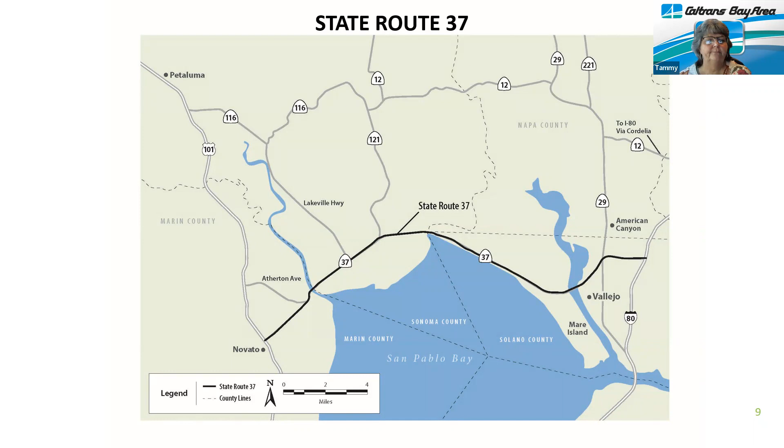Next slide, please. The PEL study we're working on for State Route 37 is the first PEL study conducted on the state highway system in California.

Some benefits of conducting a study like this include allowing us to look at the big picture by examining a broad area or corridor and analyzing transportation, environmental, community, and economic goals early in the planning process; establishing a long-term transportation vision and setting the stage for focused future projects; gathering preliminary data and considering a conceptual level of design, traffic analyses, and evaluation of environmental impacts; soliciting input and, if possible, support from the public, tribes, elected officials, resource agencies, and other stakeholders regarding agency transportation decisions; establishing buy-in from agencies and stakeholders on a corridor vision, purpose and need, range of alternatives, and consideration of key environmental issues; and lastly, encouraging working relationships and early agency involvement, which enables more effective decision-making.

One of the primary reasons Caltrans is conducting the PEL study is to address sea level rise and look for solutions. The various alignments and alternatives we have evaluated for future improvements to the corridor all consider sea level rise.

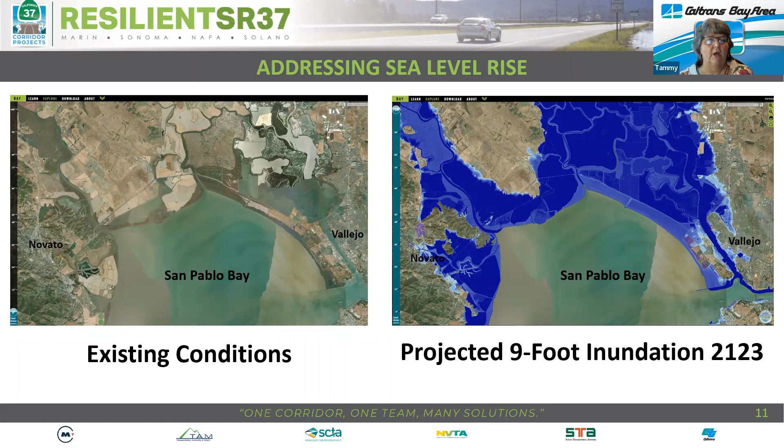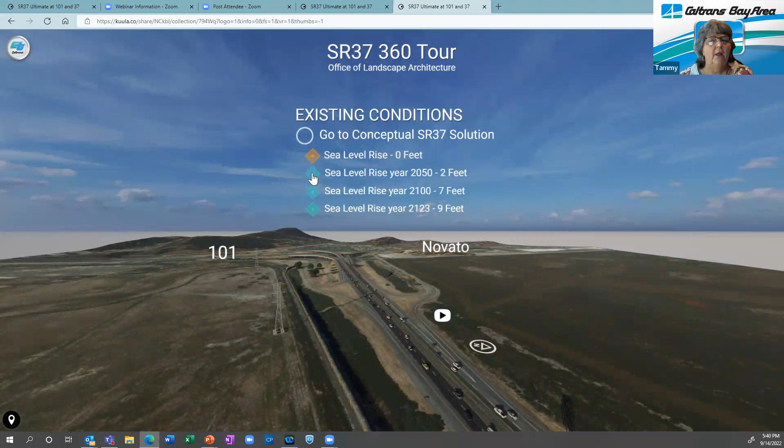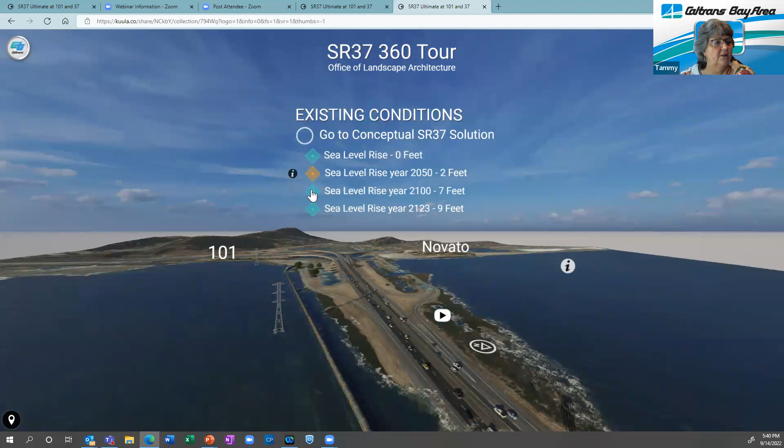Next slide, please. We've prepared several 360-degree visualizations showing various scenarios and conceptual solutions for State Route 37. The view we'll show tonight is of the western portion of the corridor near Highway 101. These visualizations allow you to scroll and view the corridor with focus on several scenarios. The first was 0 feet of sea level rise, then sea level rise in the year 2050 with about 2 feet of inundation, next 7 feet of inundation in the year 2100, and lastly 9 feet of inundation in year 2123.

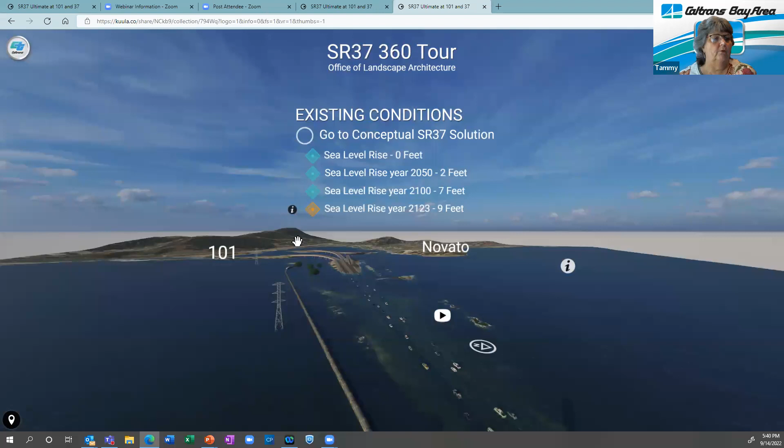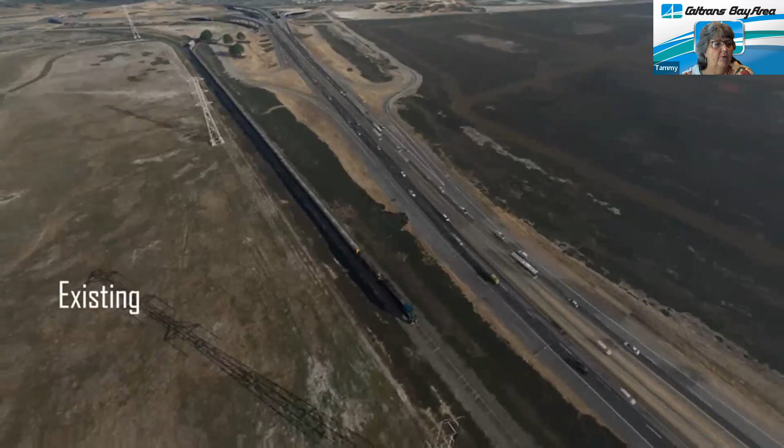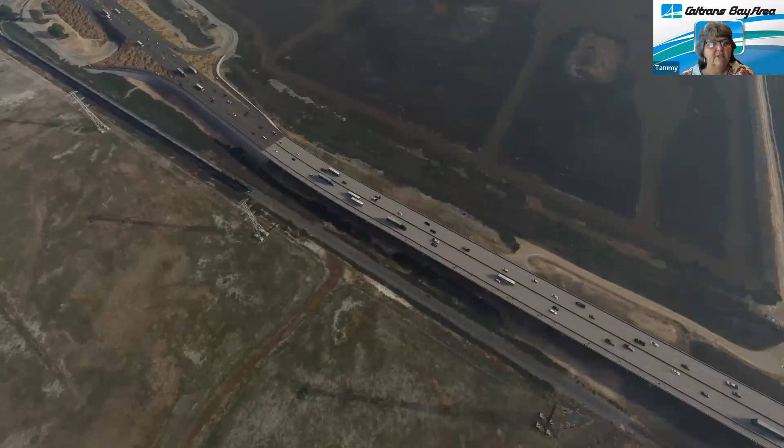We will show a short flyover of a conceptual solution for State Route 37. This starts at Highway 101 at Novato Creek, showing existing conditions, and then the projected 7 feet of sea level rise at the year 2100. You can slowly see here the inundation at year 2100.

I'll turn our presentation over to John Cook, a member of our PEL study team, who will now share details about the work we have done to evaluate potential alignments, modes, and other considerations. Thanks so much, Tammy.

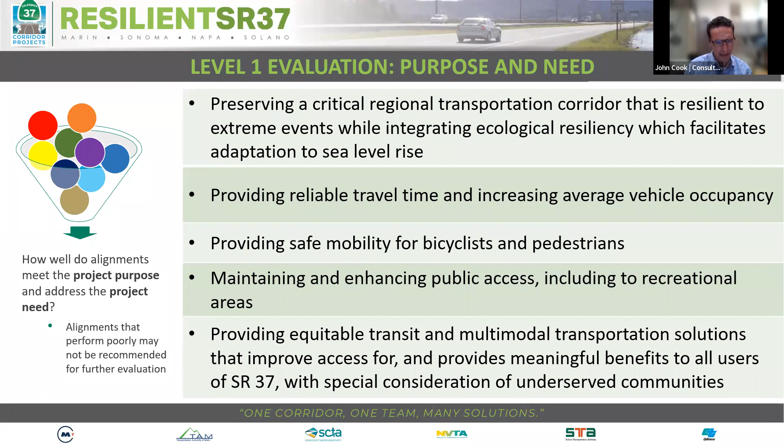This is where we started. We started with 9 preliminary alignments, part of the level 1 screening. These alignments were adapted from a number of prior studies conducted throughout the corridor over the last several years by Caltrans and by other regional transportation agencies.

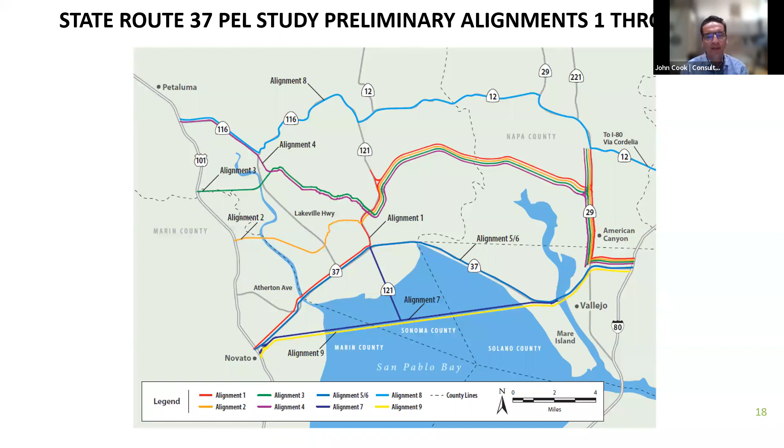So they formed a really good starting point for us in this PEL study to look at, and as you'll see, we did add some as the process went along. So I'm going to go through each one of these one by one over the next several slides, just to orient everyone to these alignments.

Alignment 1 started at US 101 in Novato and followed the existing State Route 37 corridor east towards Highway 121 at Sears Point, continued north on existing 121 just past the raceway, and then took a turn to the east over what would be a new roadway. This roadway roughly parallels some existing railroad tracks in the area that connect over in the Highway 29 area and continue on towards Suisun. Eventually this new alignment would meet Highway 29 north of American Canyon, and people wishing to get to Interstate 80 could go either via Highway 12 in Cordelia or go south through American Canyon and connect in Vallejo. So that's alignment 1.

Alignment 2 would have started again from the west, creating a new interchange on 101 just north of Novato, between Novato and Petaluma. It would go cross-country across marshland, including a bridge across the Petaluma River, and then cross Lakeville Highway, eventually making its way towards Highway 121 and using that existing alignment for a few miles. Then again it would take that turn to the east, following the same alignment as alignment 1 along the railroad tracks towards American Canyon and I-80.

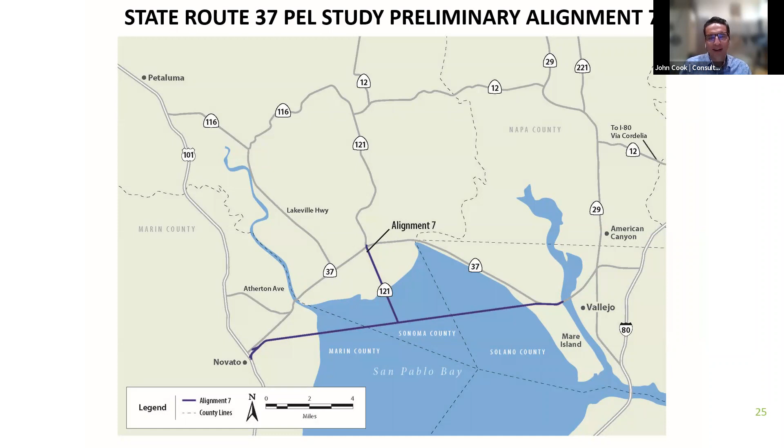As we're seeing some comments in the chat, you'll see that a lot of these were screened out. So please stay tuned, and you'll see some results soon. If we can go to the next slide, please.

So this roadway, unlike some of the other alignments I showed you before, is already there, but the concept would be to expand it a bit to handle additional capacity. And the existing Highway 37 would be abandoned in that circumstance. So, okay, let's continue.

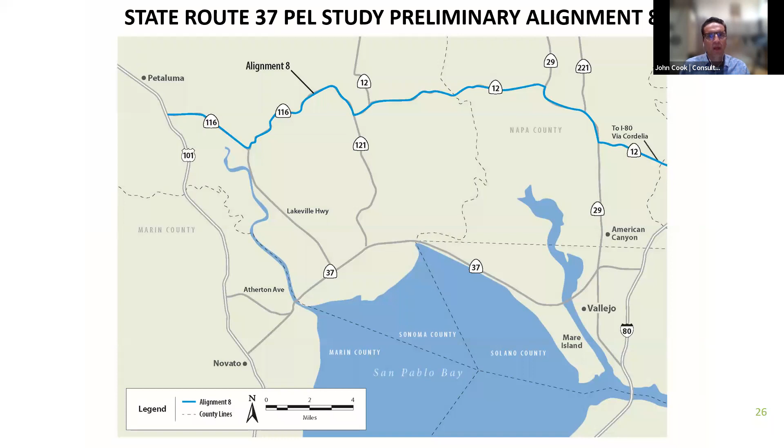Alignment 9, our final one here, is just a more direct crossing of the bay, similar to alignment 7 that I showed you a minute ago, without that southerly extension of SR 121. This would be a simple bay crossing from Novato to Mare Island, fairly direct. It would be a few miles shorter than the current routing of State Route 37, but again, it's a new bay crossing.

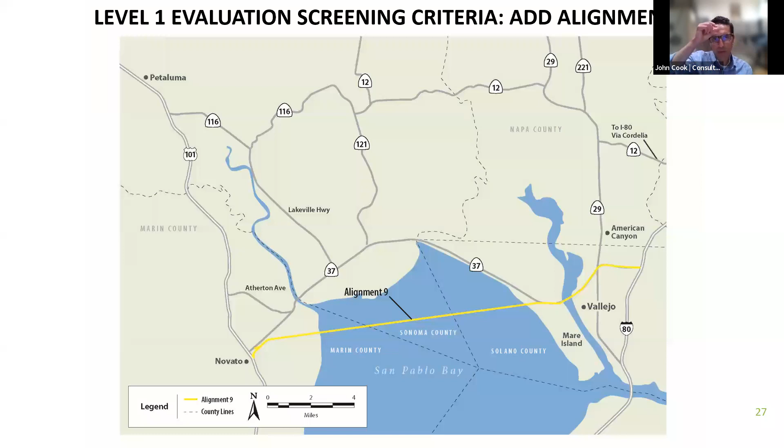So, next slide please. In addition to these different alignments, part of the screening process also looked at various transportation modal concepts.

One thing not shown here that I want to emphasize is bicycle and pedestrian access. We showed you in the purpose and need statement that bicycle and pedestrian was very important. During level 1 screening, Caltrans made clear that any new facility it constructs would include safe bike and pedestrian facilities, whether on an attached lane or a separate route. So it wasn't really a differentiator anymore, it was just accepted that any of the alternatives carried forward would include bike and ped facilities.

In terms of other modes on the table, one was a floating bridge. This is a picture of, I believe, Lake Washington, State Route 520, connecting Bellevue to Seattle, and this bridge does float. Given our bay environment here, there was some consideration of something like this that could be resilient to changing water levels, since the bridge adjusts with them.

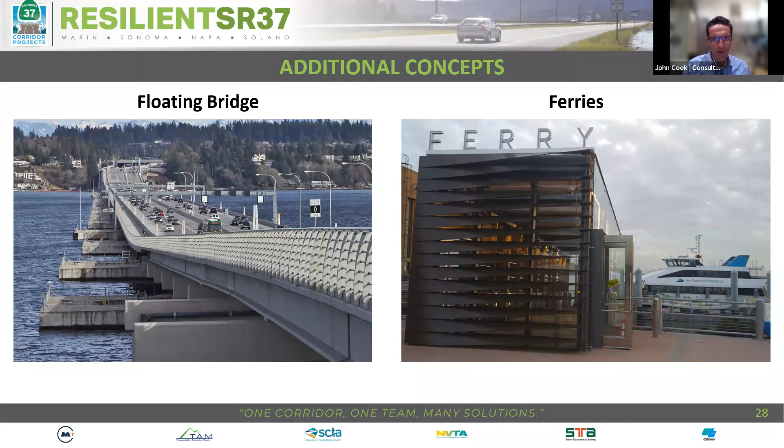Also not pictured here is rail. SMART, the Sonoma Marin Area Rail Transit, has been an active participant in this process from the beginning, and they have been doing some of their own planning here. We'll say more about rail as it goes forward, but let's go to the next slide.

Working with our stakeholder working group, technical working groups, and the PEL study team, we came up with some initial recommendations for the level 1 screening. As I'll show you, we went through those recommendations with the stakeholder working group and technical working group, and actually changed those recommendations as a result of engagement with the participants. The initial recommendation was to eliminate alignments 2, 3, and 8.

Alignments 2 and 3 aren't shown here, but they would have gone cross-country from 101 over the Petaluma River. Alignment 8 is shown here, as you'll see in a second. You see at the bottom here it was actually carried forward. We'll say more about that in a minute.

We made a recommendation that alignments 5 and 6 were similar enough that we should just consider a single combined one. Then the recommendation was to eliminate the floating bridge as a modal option because it would pose difficult challenges, since this is a navigable channel, and a floating bridge is usually quite low to the water, so you cannot really put boats underneath it. So the floating bridge option was recommended for elimination very early on.

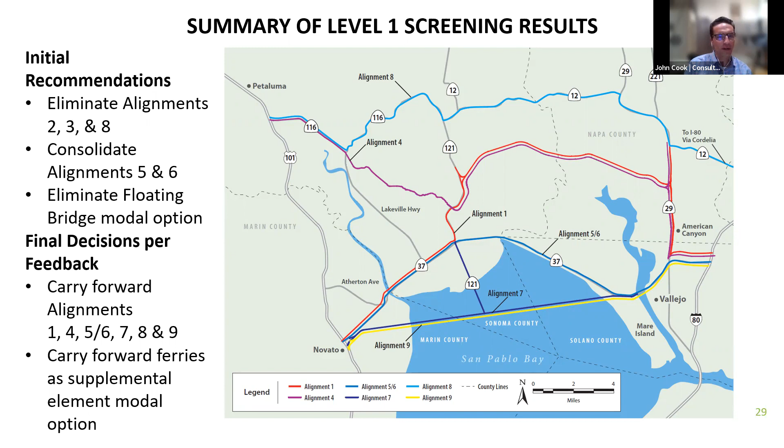So we've thrown a lot on the table here. My colleague Jeff Berna is going to go through our level 2 and 3 screening on how these alignments were further winnowed down and how we got to a single alternative to carry forward at the end. Jeff? Great, thanks John.

If anybody joined us late, I want to do a recap of our process. We're going to walk through the evaluation criteria. I'm going to speak to level 2 and level 3, then turn it over to Tammy Massengale from Caltrans to conclude, like where are we going after the study, how can you get involved, and such.

Again, if you want to chat, please put your comments in the chat. We are tracking them, we'll revisit them, and we're going to open it up for Q&A here at the end. So we're about two-thirds through this presentation.

So in the level 2 criteria, the whole process is very similar to what John described for level 1. We begin by developing the criteria: what are the questions we need to ask to help evaluate the best alignments and alternatives? This was developed in coordination with a lot of stakeholders, because many others have intimate knowledge of the resources and issues in the corridor.

You can see on this slide we're looking at traffic, design, environmental—not only because it helps to capture similar criteria, but we also had technical working groups assigned to things like traffic issues. We had traffic experts wrestle with what are the right questions and what should we evaluate, what can we count. Same thing with design—we pulled in design experts and environmental experts throughout the corridor.

And the last, feasibility—some of the ideas and concepts were thrown out. Is it even feasible? You can see from John's conversation that, for example, the floating bridge has some feasibility concerns. So with each of these, we applied the criteria.

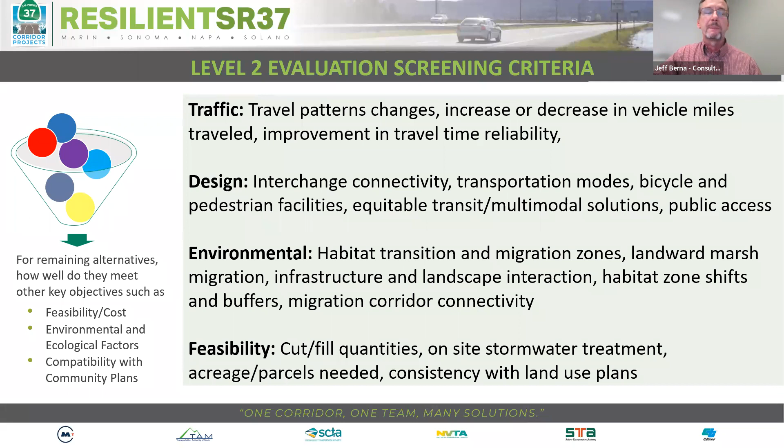We applied that on the next slide to those alternatives—again, those alignments that John said we carried forward. We applied those level 2 criteria to all these alignments, and then, based on feedback, we added an additional alignment. On the next slide.

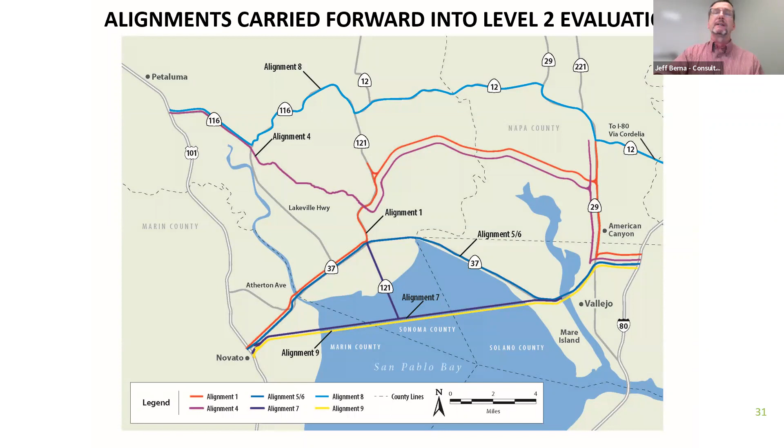Based on the feedback, we received some input. For example, alignment 9 was that direct cross right across the bay. There's a lot of benefits to that—it's the shortest route, with time savings and travel time reliability, all of which was great. But some downsides of that alignment were: what happens to the current access on 37? What about the connection to 121, which is very important for regional travel patterns?

So based on input, we said, why don't we combine the two? Let's look at the western portion of 37, maintain that connectivity to 121, but also have that direct route across the bay. So we folded and created alignment 10, and we applied the criteria to all of these alternatives, then applied the criteria on the next slide.

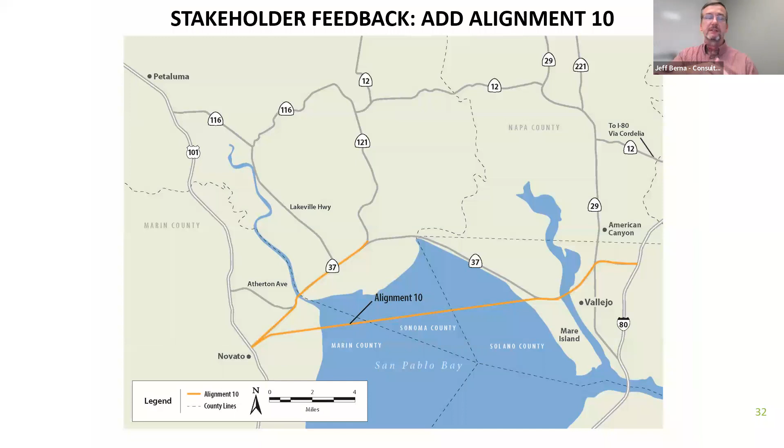These were the results, at a high level. If you're interested in looking at the PEL report when it's produced and consolidated, you can look at all the criteria we examined. These are really just the high level points here.

Based on the application of that criteria, we'd like to eliminate alternatives 1, 4, and 7. Alternative 1 followed the existing corridor partially, then a new route. Alternative 4 came down from Petaluma, then onto that new route. And 7 was the one that went across the bay with that odd connection straight to 121.

In addition to looking at all those alignments, we also examined 4-lane and 6-lane roadway designs. Based on the traffic volumes, and recognizing that we don't want to increase the VMT, vehicle miles traveled, we eliminated the 6-lane design option. We did consider it, we saw the benefits, but we also saw the demerits, so it was eliminated based on the criteria we developed.

So what does that mean? We want to carry forward alternatives 5 and 6, which are the existing alignments, 8, which is to the north, and 9 and 10, which go across the bay, one of them with a western portion.

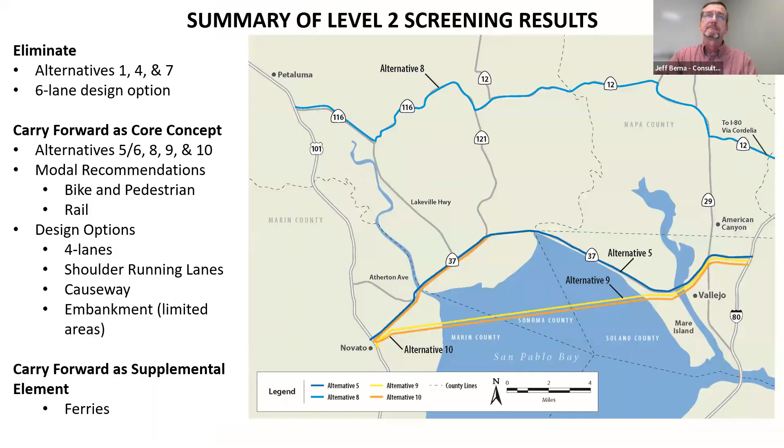So that led us down to level 3. We got through 1, 2, and 3, right? We went from 9, we added some alignments, and we reduced them. So now we're looking at 4 alignments or alternatives, and we applied 43 screening criteria. These criteria follow the same things we had before as far as traffic and environmental factors, and we combined some of them. At level 3, we also added additional design details.

Initially, we were working off the alignments as they were identified in prior studies. But by the time we got to this point, we applied our design standard. Like John mentioned with the northern route, there's one following existing 116 and 12. Well, that would not meet the design standards that we're designing to here in anticipation. So there would be a lot of areas that would require additional rework along that alignment.

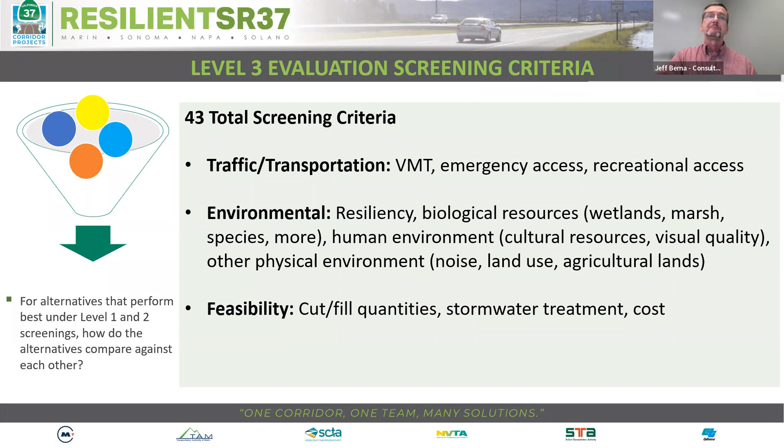So we'll go look at it on the next slide. These are the alternatives carried forward in level 3, and we felt pretty good about having this range. We're looking at a totally uplands facility to the north. There would still be some sections that would have to be on causeway because the inundation does make its way up that far north. And then you also have flooding issues.

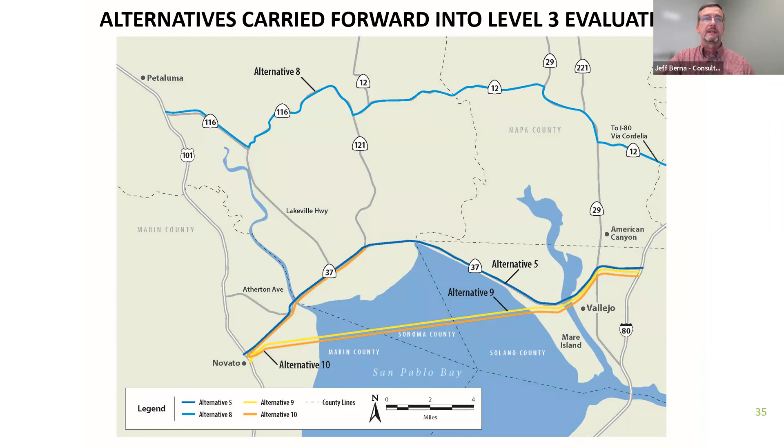And then you can see we're carrying existing 37 as alternative 5, and again 9 and 10 we evaluated. So based on when we applied the criteria, on the next slide we get into the results.

Based on the application of the criteria, we're not recommending for further evaluation the following three alternatives. Now, alternative 8 -- we feel that, as you can see, if we were to build alternative 8, another underlying assumption is that existing 37 is abandoned.

So think of some of your travel patterns. From Vallejo to Novato now, you're going to have to go north, west, and then south. So there's a lot of this non-directional traffic, and that's that travel pattern. It's a disruption of some of the normal patterns we see, both for commuters, locals, through traffic, freight, etc. And also, because of the application of that design standard I mentioned, there are considerable impacts. Because of the undulating terrain, it would require lots of cuts -- you're familiar with driving down the road and seeing these large road cuts. There'd be a substantial number of those cuts and other areas that would need to be filled, and that leads to additional disruption to a lot of the connectivity for habitats and other species in the uplands.

When it came to alternative 9, it just goes straight across the bay. It has its own impacts -- the bay is very sensitive, it's a very dynamic environment. Particularly if this were to be an embankment, that certainly would be problematic. And even on a causeway, there are still environmental issues and impacts associated with it.

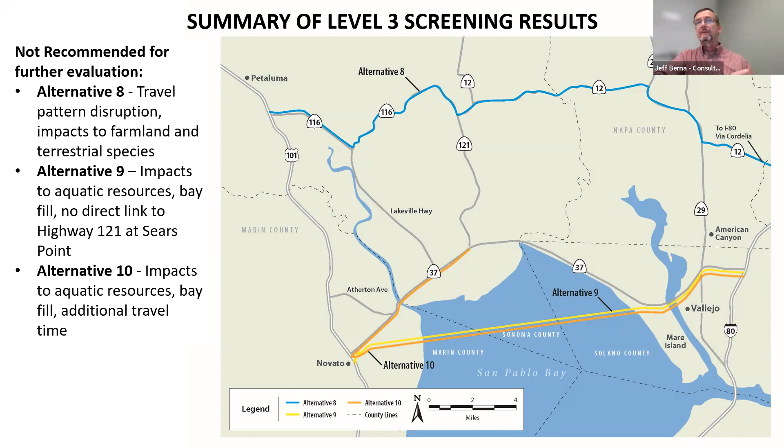So based on our level 3 screening, we arrived at a recommendation. Caltrans' recommendation to move forward, meaning to move out of the PEL study, is that we've gone from all these alternatives and considerations -- and I know we've seen some chat, people asking about impacts from some of those alternatives -- at this point, we are now focused on alternative 5. And we say alternative 5, it really is a corridor; we don't have a specific pen-to-paper specific alignment as far as impacts.

So we'll leave it there. It utilizes the existing corridor, so that's one of its chief benefits from an impact point of view. But also think of all the access that currently comes off of 37. If we had a lot of those alternatives, a lot of these properties would have no access whatsoever.

Based on our work with the environmental groups, we recognize the benefit of an alternative 5 corridor built on a causeway, meaning an elevated structure. That allows for some of the natural landward marsh migration and tidal migration, because not only is the sea going to rise, but every time it does, it's going to change that transition zone, and it's going to move over time. Right now, 37 is an impediment to some of those natural hydrological connections. So by removing the existing facility and the fill associated with it, and putting the alignment up on a causeway, we can not only address sea level rise but also bring considerable improvements to natural hydrology and natural functions. That's why we're really excited about this alternative and alignment.

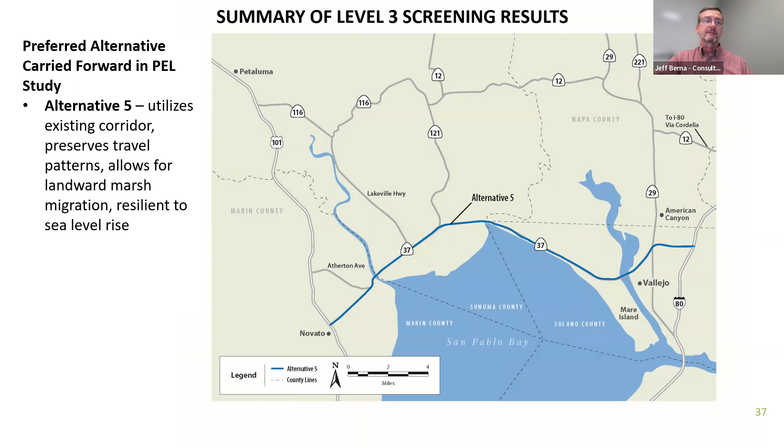Next slide. So what is this going to look like? This is what we're moving forward with, to be studied further in greater detail. It consists of an expressway design with 2 travel lanes in each direction, and it will also have that shoulder running lane.

The intent there is really for use during peak periods, the periods of heaviest congestion. We're looking at a 60-mile-an-hour posted speed limit, and there are other factors too, because that helps establish your design standards, like your curves and grades. So it's important to establish that.

We also considered bike and pedestrian accommodation. For some stretches, a bike and pedestrian facility can be associated right on the causeway. In some cases that's not ideal from a safety point of view, or aesthetics, since users don't want to be that close to high-speed traveling vehicles. So in some areas, a bike path facility may be connected on the side of the causeway or hanging off of it, or a separate adjacent path, or in upland situations, it may meander through the existing right of way, further from the traveling vehicles.

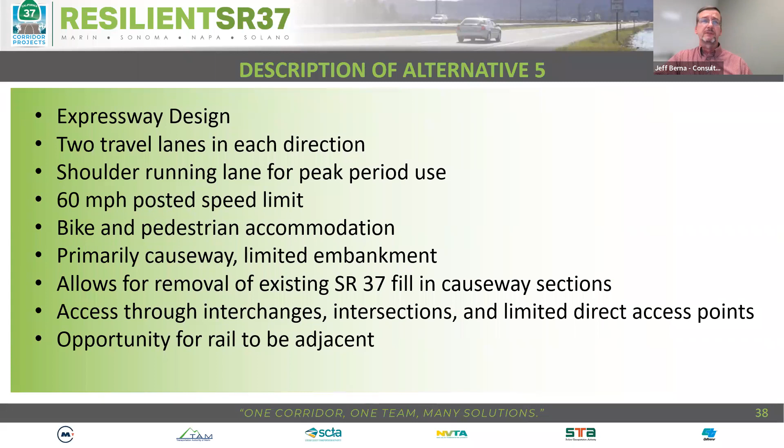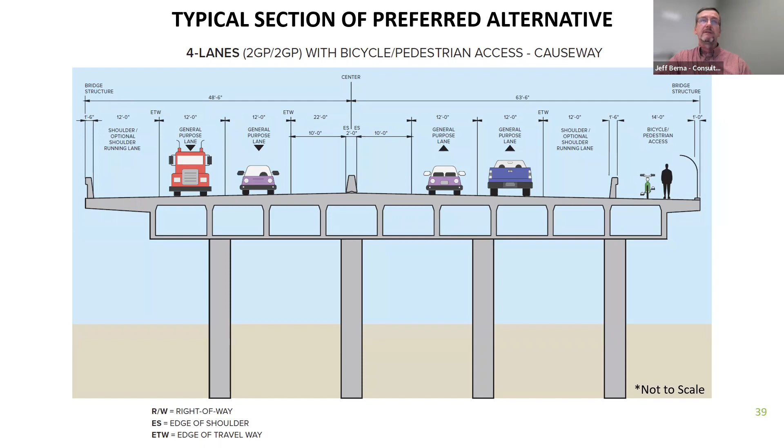Conceptually, we're showing the bike pedestrian facility associated with this section of the causeway on the actual causeway, but in some cases it may be hanging off, or meandering off the pavement but within the right of way. You can also see the structures that allow for hydrologic connectivity, since it's really a pier-supported system. That's the final slide I'll discuss before I hand off to Tammy, just to give you an overview.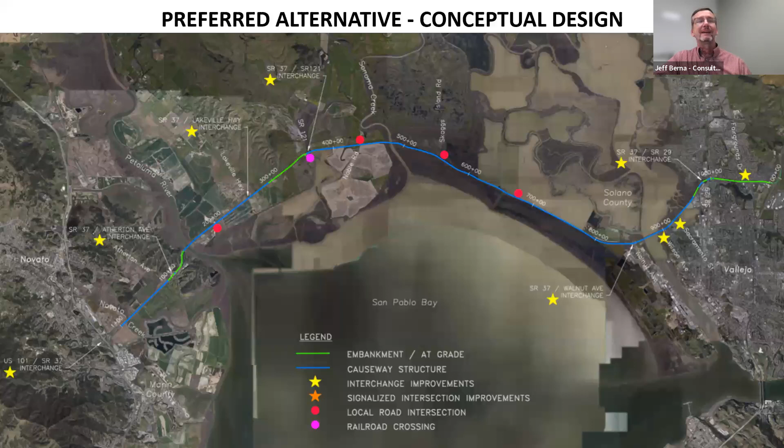And then again, there's an interchange as you get further east in Vallejo. So that is what we're looking at, and we're excited about it, I believe, right Tammy? At this point, I will turn it over to her. Thank you.

Great, thank you Jeff. As you can see, our team has been hard at work analyzing all of these different alternatives for the PEL study. As we mentioned at the outset of the meeting, we undertook the study to bridge the gap that takes place in the project delivery process between planning and environmental review, and realize some efficiencies and benefits.

Our work to date has already seen the benefits of conducting a PEL study. Some of the key benefits we've realized are from examining the environmental and community values throughout the process. This included involving agencies and others as partners, identifying both concerns and opportunities for collaboration. The process allowed for broad participation by stakeholders to help shape the transportation solutions for the corridor.

We've worked with many stakeholders to evaluate the alternatives that led us to this preferred alternative. Another benefit is the enhanced and early coordination with resource agencies and the public, which has helped us preliminarily design a transportation project that we expect to serve the community's transportation needs more effectively.

The PEL study and its many supporting studies will provide agencies with tools to design better projects while avoiding and minimizing impacts on communities and natural resources. The process has helped build better interagency relationships and will also help resolve key differences on issues moving forward from planning through design and ultimately project implementation.

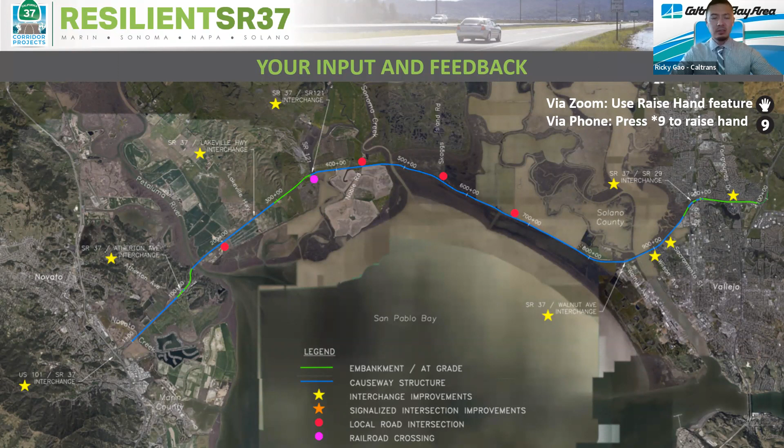Sure, thanks for this question. We have a few other projects on the corridor, which we call interim projects. For example, the project in Marin County, the interim flood reduction project, is also currently in the environmental phase, and that project will most likely be constructed first, before the rest of the corridor's ultimate project is constructed. Also, there are other projects subject to flooding being studied outside of State Route 37.